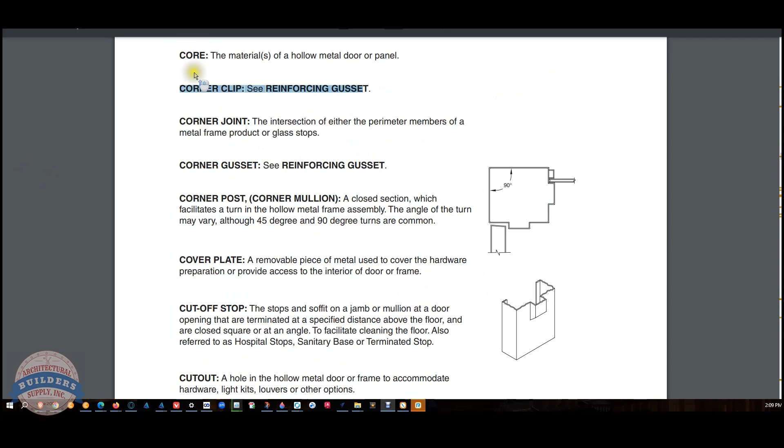Okay, so here's the definition. Corner clip, reinforcing gusset. Let's just go down to reinforcing gusset and see what they come up with here. Reinforcing gusset: a flat or formed component at junction of head and jamb used in interlocking of knockdown frames. May be used as an alignment feature on punch mitered frames. I've got to tell you, I'm drawing a blank on what they're driving at there.

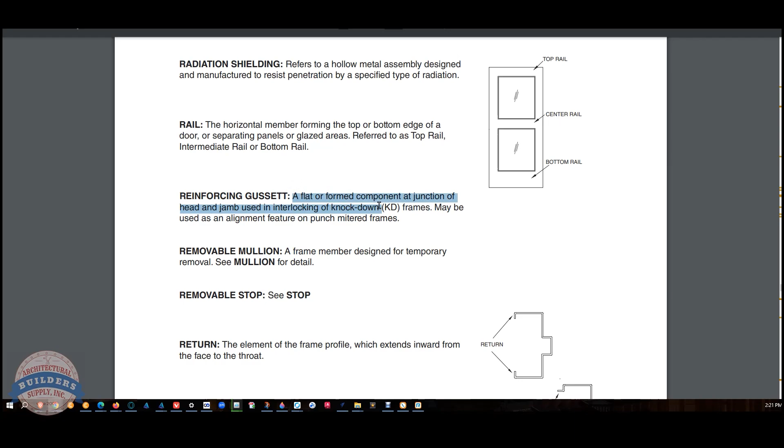But when I think of what a reinforcing gusset is, and I'm not familiar with every manufacturer's hollow metal, in standard construction, reinforcing gussets really aren't used. I mean, I can understand the words they use and the order in which they use them. A flat or formed component at junction of a head and jamb, used when you're interlocking the header and the jamb together. So if you had a, let's use part of this actually.

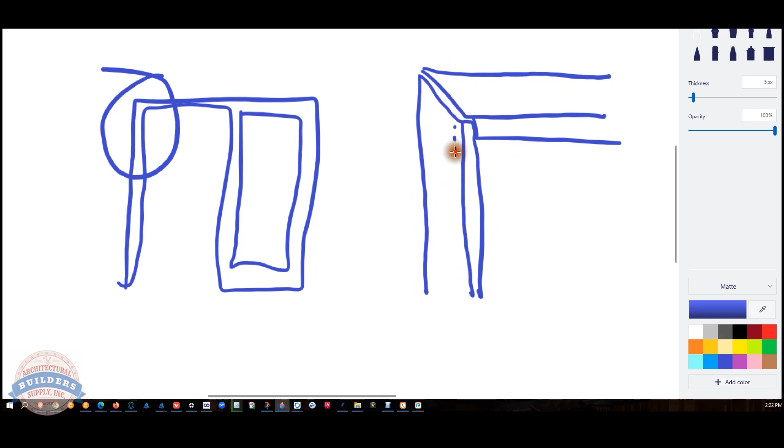All right, so over here, jamb, right, header. So what you can very likely see is a reinforcing gusset that's going to be like this. Dotted lines because we don't see it. And then there'll be a little tab that sticks up. So that gusset is welded to the backside or the inside of the throat of the frame. It's welded right here. And that little tab sticks up.

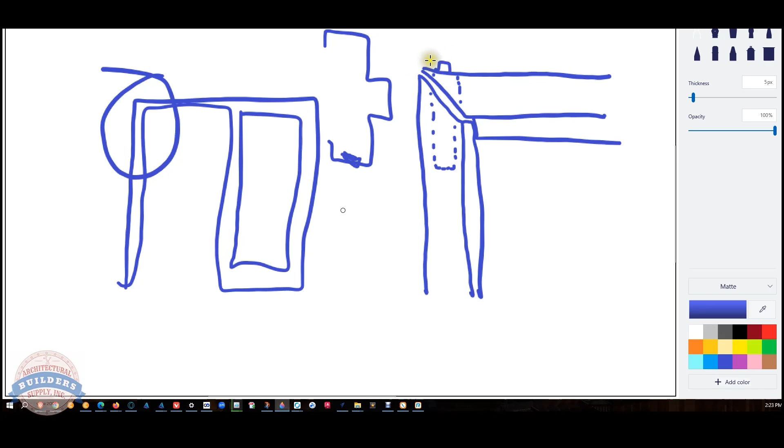Well, there's a slot in the header. You bring those two together and you fold that tab down. That's a reinforcing gusset. So I was just looking at a manufacturer's technical manual. Let's see if I get lucky twice in a row. I don't believe I have any experience with this company, but I bumped into their tech manual looking for something on ballistic doors. DCI hollow metal on demand. So let's see what they have.

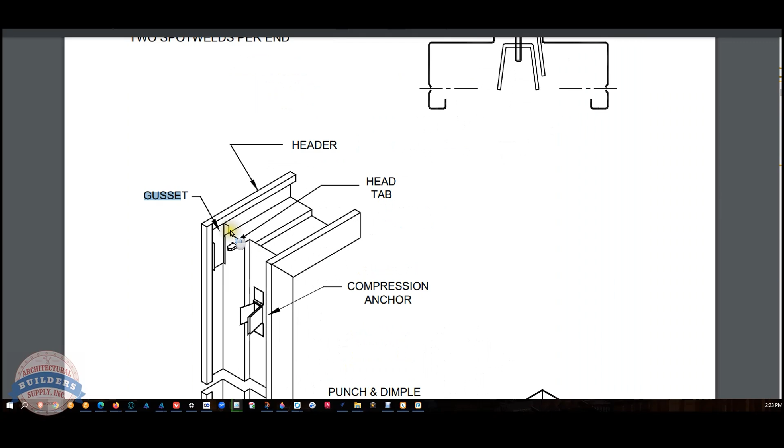Technical data manual. So let's type in gusset. Yeah, exactly what I thought. There you go. So I've got a reinforcement piece back here. Field assembled jamb and gusset tabs are to be bent in field after assembly. Yeah, there you go. Now, for me, back in the old days, you wouldn't see a frame that has a gusset, in the sense that the jamb and the header are literally punched in the flat.

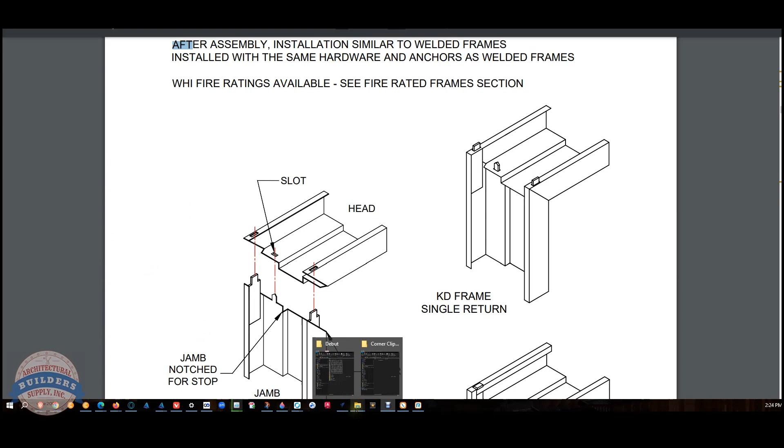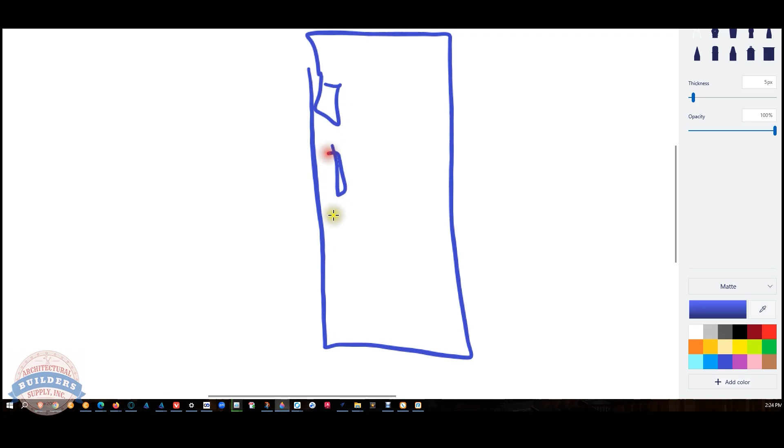I've seen it done back in the old days at Kiwani, where the steel would be literally in the flat, meaning here's a piece of steel, and, don't quote me, but it's 12-inch wide. And then they lay it on the bed of the CNC turret. And then the turret comes and it punches every possible hole that's necessary. And then they punch all this off, and they punch this out. But part of what they leave is the tab hanging up.

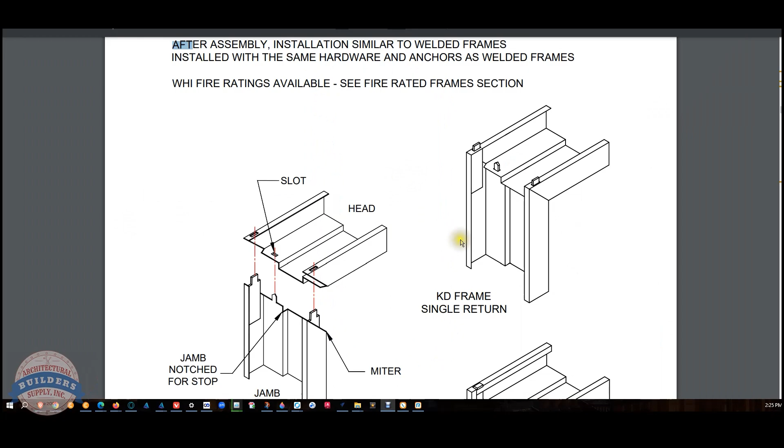So there's not a gusset that's been welded in a secondary operation. It's all part of the frame because it's been punched in the flat and then put on a press brake and bent. But you can certainly understand if you're doing custom work, you don't have an ability to have tabs. That's pretty hard to cut on a die grinder. So you would have gussets that you would then weld into your jamb.

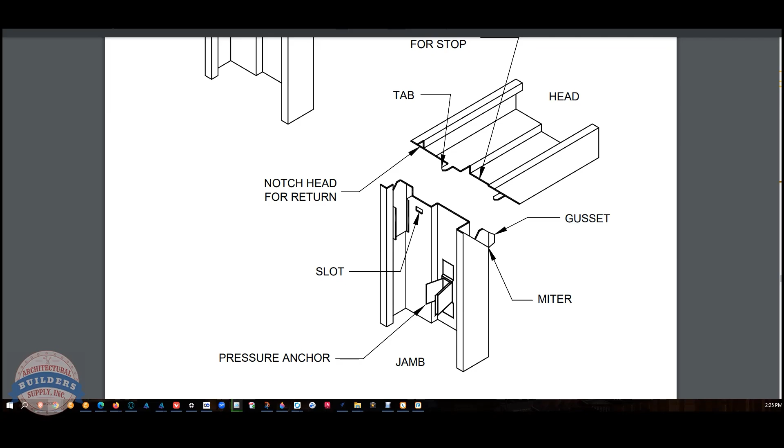Let's imagine you were using jambs out of stock material, but you were using stock headers that had the slots. You'd be able to use a reinforcing gusset for that. Very much a piece that you're going to use when you're doing fabrication work. Let's also take a look at Gulfport. If anybody has reinforcing gussets in their catalog, it would be Gulfport. Product catalog. G-U-S-S.

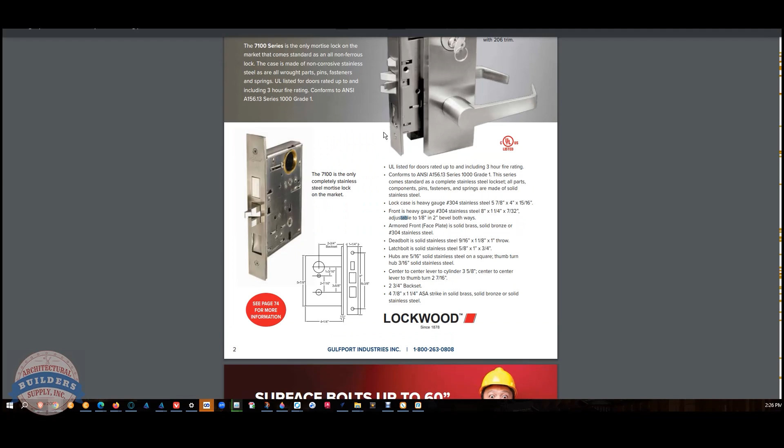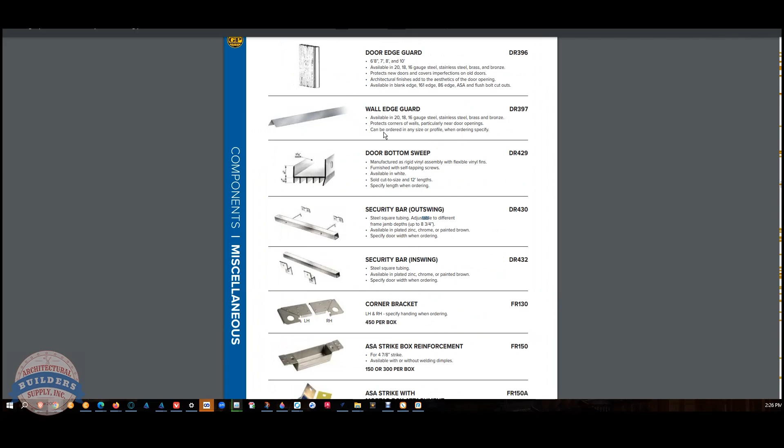Let's look for tab. There are lots of things called, well, welding corner tab. That's not a gusset. And by the way, my initial understanding of corner tab, both of the definitions were wrong, obviously. Yeah, I don't see any gussets. I'm quite sure that they could make them. But those corner fillers I was talking about are basically here. That's the first thing I talked about. Weld corner tab.

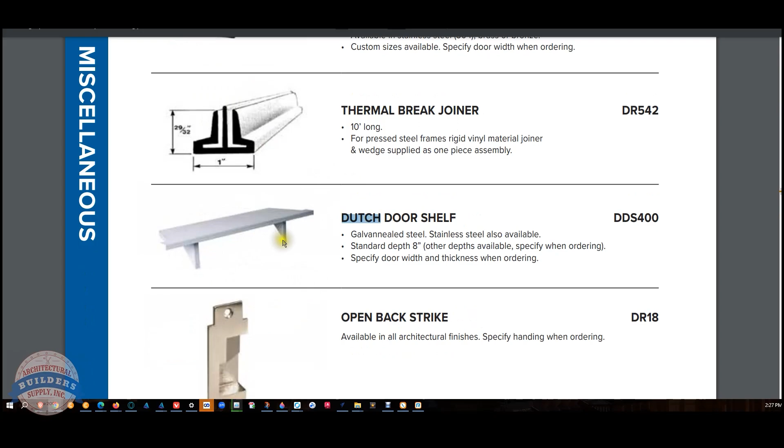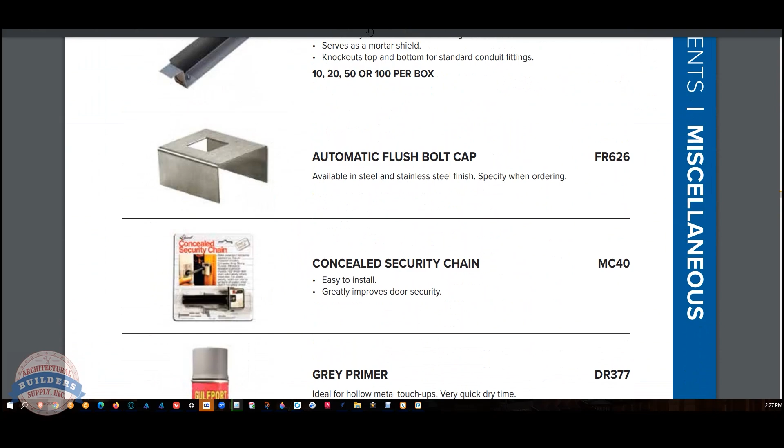Our definition is corner gusset. Yeah, so a corner tab. And then I had also mentioned the reinforcing bracket for a Dutch door frame. So is it, I suppose, a type of gusset or a reinforcing piece? Yeah, it is. I'd call it a shelf support myself. So that's what I know about reinforcing gussets. Our next definition is going to be corner post. Oh, I can talk about those.